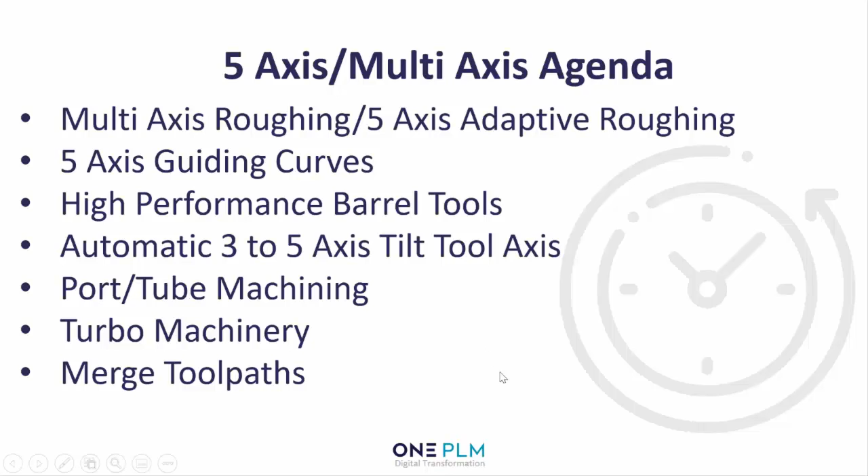So we've all seen that the manufacturers are quickly adjusting to the new market trends. To stay competitive, they are making significant investments in the latest hardware and software technologies. Sophisticated multifunction CNC equipment, high-speed machining and toolpath verification are some of the biggest impact investments in the last 3 years. Today we'll talk about one of these technologies, 5-axis or multi-axis machining. You'll learn about the latest developments in this area and how you can utilise this technology to run a more efficient machining business.

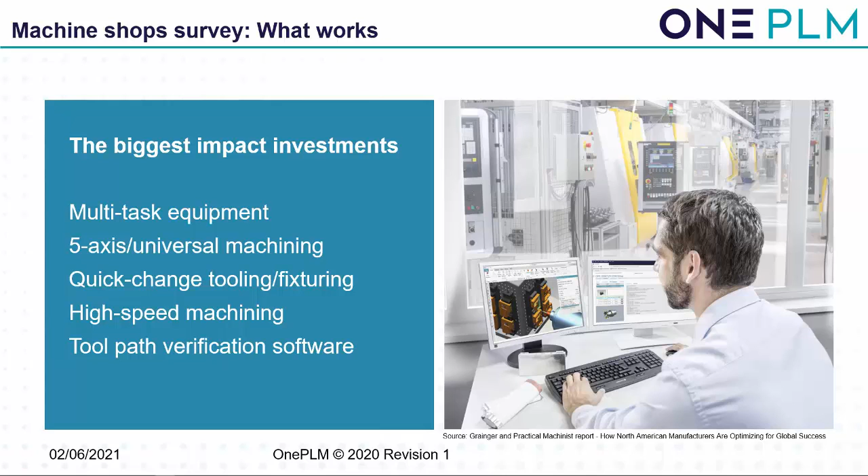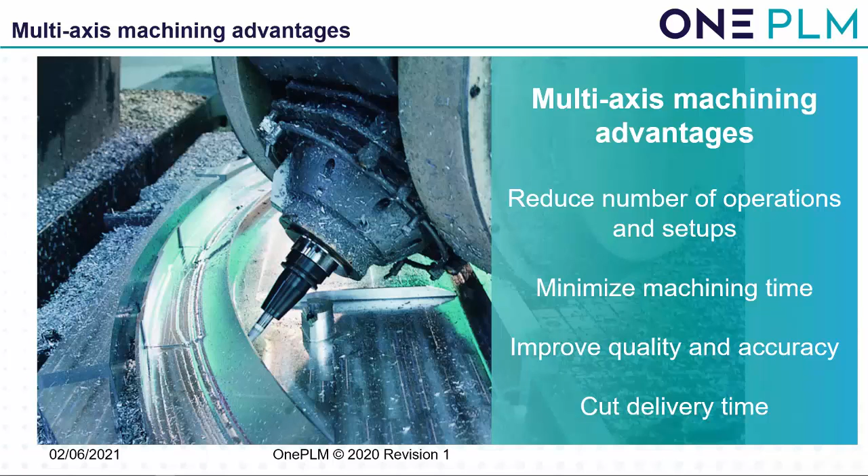Manufacturers are increasingly using 5-axis machining because it provides powerful advantages. You can produce complex parts with fewer operations and setups. In many cases, you can reduce machining time, improve tool life, and also improve part quality. Consequently, this helps you cut production costs and deliver parts faster.

5-axis machining is typically used for manufacturing complex parts with challenging geometry, such as aircraft structures and engine components. As the complexity of different parts has been increasing, 5-axis machining has been used for a much wider range of parts, including mould and die and medical. The machining process can be quite challenging.

The simultaneous 5-axis operations are performed on high-performance machine tools. Maximising machine uptime and avoiding collisions are critical for these operations. So as well as the aerospace industry, multi-axis machining is now being used in many other industries, including medical, energy and automotive sectors.

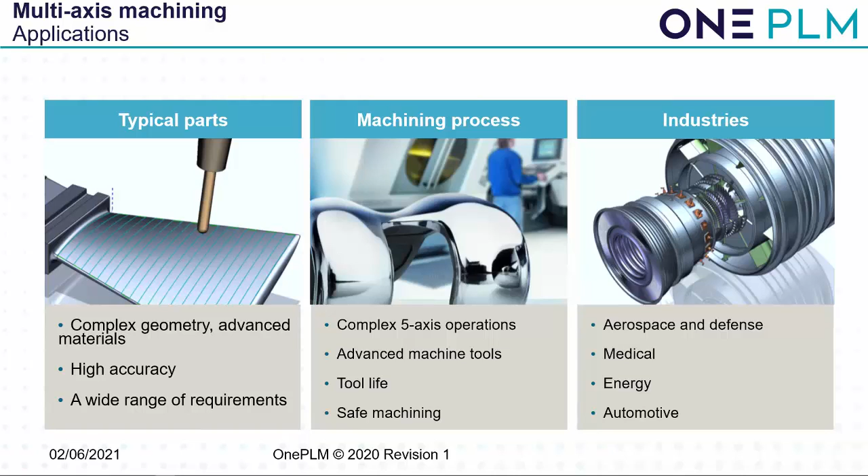To effectively program 5-axis jobs, you need a set of advanced tools in your CAM system. Most importantly, you need to have full control of every aspect of the machining process, especially the tool axis. Ease of use and minimising manual input to create these complex operations can help you be more productive.

Having specialised programming operations for specific operations, such as blisk and impeller machining or port machining, can be critical. Using standard generic 5-axis functions to program these types of parts can be time-consuming and can be prone to errors. Also, for seamless transition to 5-axis machining, advanced CAM software should also have capabilities to automatically convert 3-axis operations into full 5-axis operations. Collision-free, of course.

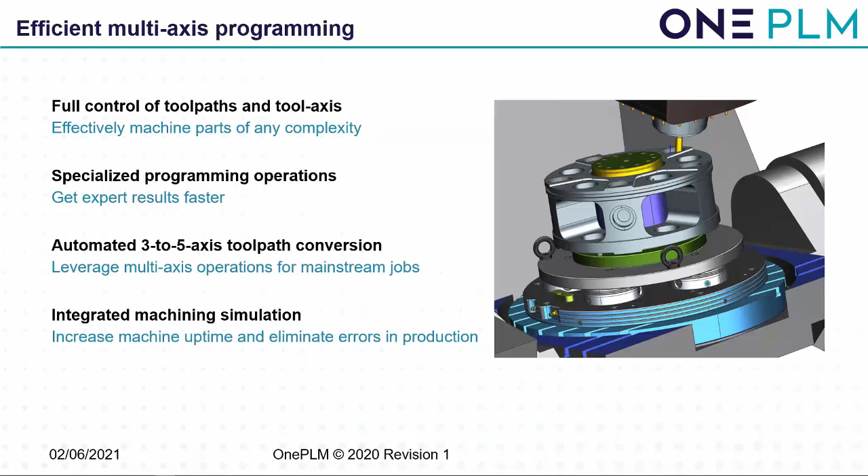First of all, let's look at multi-axis roughing. When machining a part, the goal is to remove material as fast as possible. Most of it's done in the roughing operation. When dealing with mould and prismatic shapes, the fastest way to do this is using our high-speed adaptive milling roughing cycle.

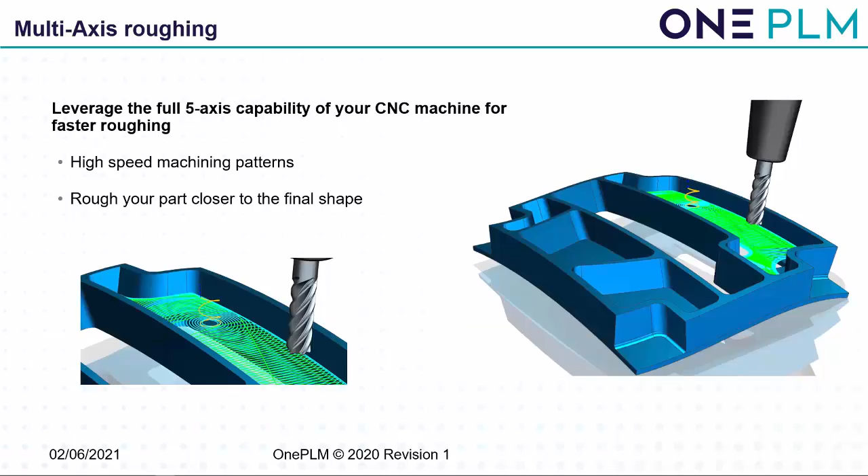With this type of toolpath technique, you can cut curved floors and other complex shaped pockets and features in simultaneous 5-axis mode. This allows for added flexibility to mill around these complex shapes and minimise follow-up operations to clean up any remaining material. It utilises the latest adaptive milling techniques of controlling step over, cut depth and chip thickness to employ high feeds and speeds.

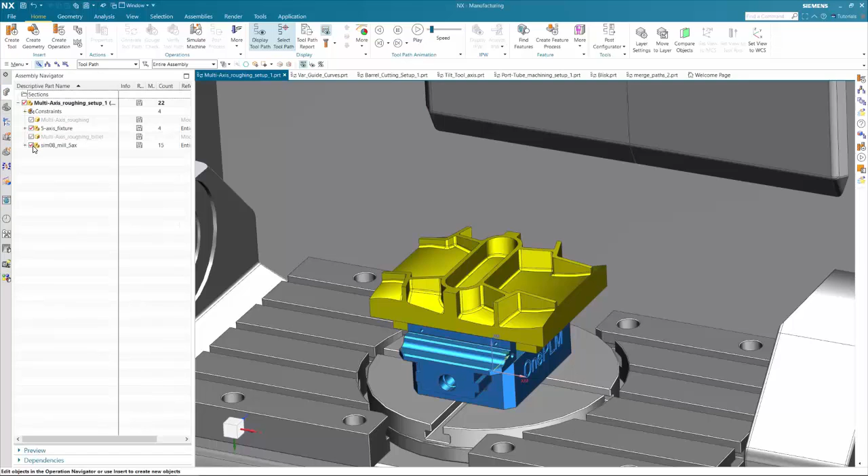So let's take a look at this in NX. So I've got this multi-axis part, it's got some curved floors, some curved profiles, and we're going to look at how we can quickly rough this out in a multi-axis mode. I'm just going to temporarily hide the machine so we can look at the toolpath in a little bit more detail. So here's the multi-axis roughing operation.

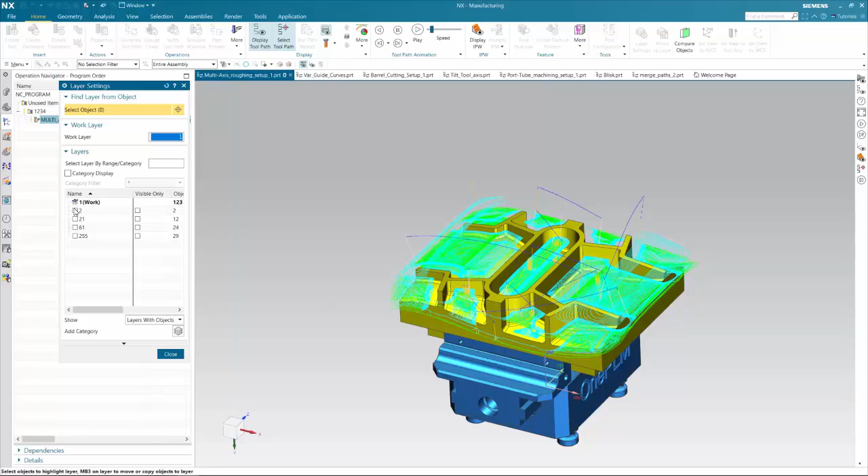If I just go in to have a look inside that operation, there are some things that are worth pointing out. We can specify a drive floor and calculate the depth mode from that floor, or we can define a drive ceiling and define the depth mode from that ceiling, or in this case I've defined both and we're going to interpolate between the two. If we just quickly look in my layers, you can see that I've created just a simple curved surface as the drive ceiling and a surface as the drive floor.

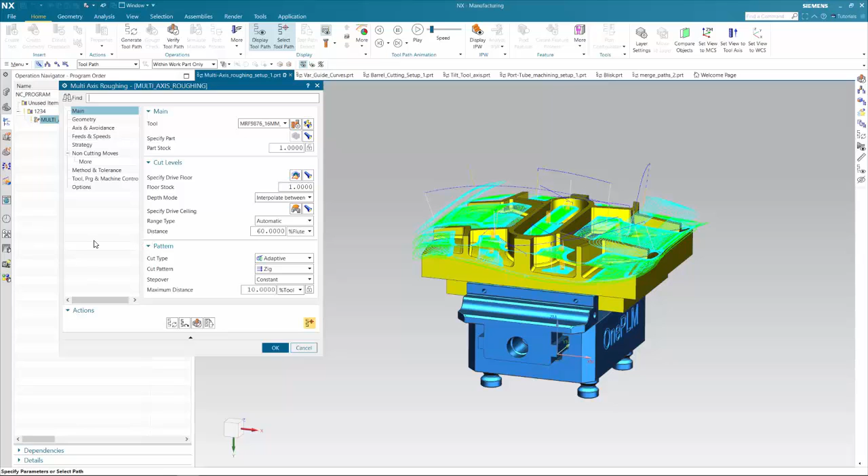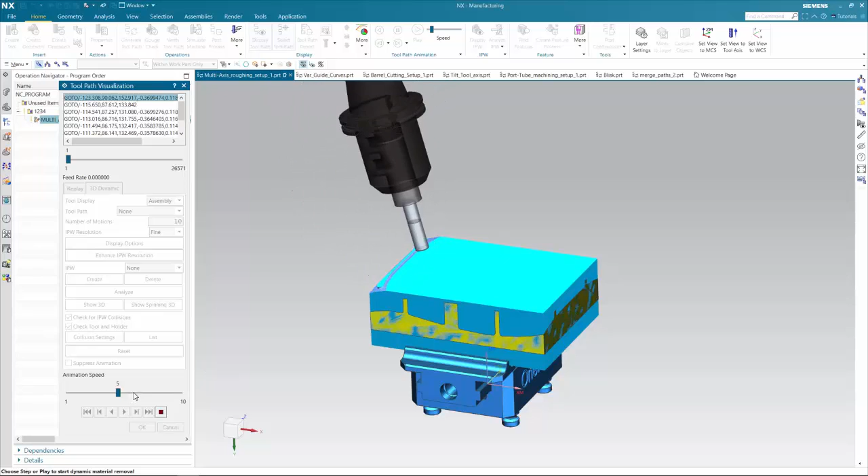I'm using the adaptive cut type and I've defined the cut depth and step over and so on based on the requirements of the operation. If we just verify this, you can see that if I quickly just press play, this is a true simultaneous 5-axis operation. The tool axis is indeed changing angle all the time, and this is being driven automatically by the operation. I didn't have to put any tool axis vectors in or anything like that.

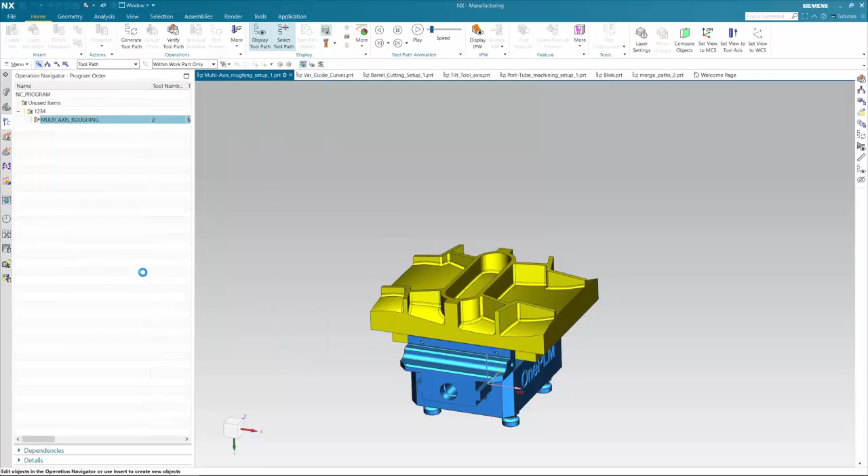I mentioned earlier that one of the big necessities of multi-axis machining is the ability to simulate the G&M code offline before you send it out to the shop floor onto the real machine. I'm going to just switch the machine back on, and then I'm going to go into NX's simulate machine function. This is built inside of NX. This is standard in NX nowadays. I go into Simulate Machine.

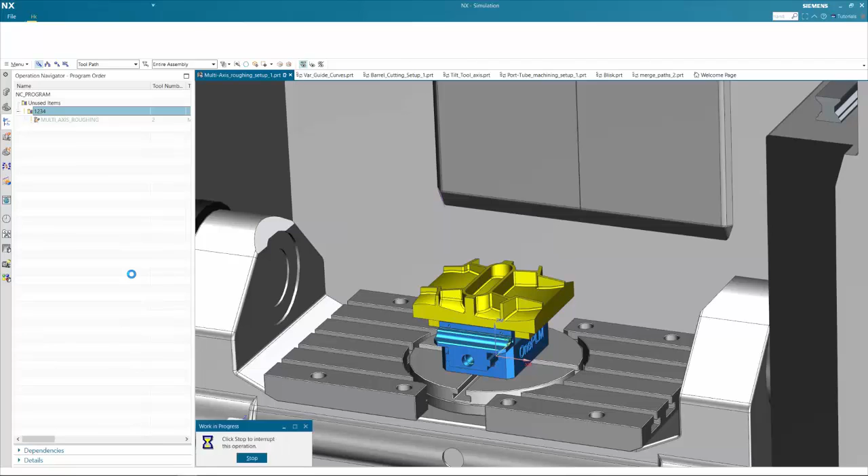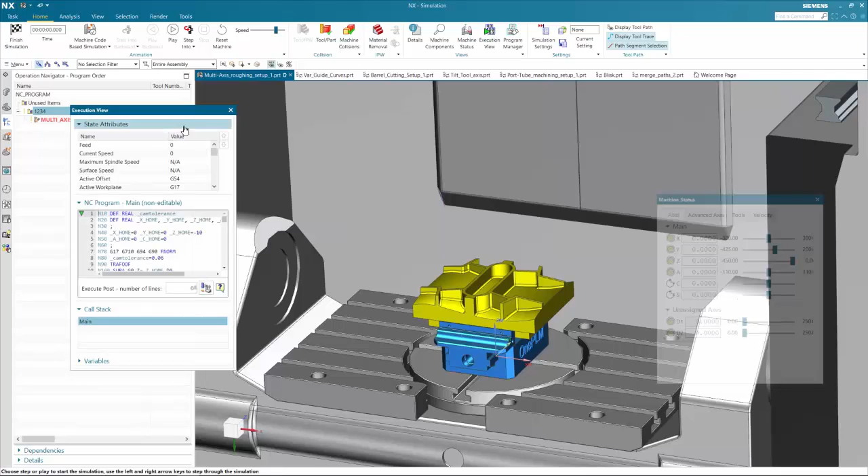So you can see that the program has been post-processed in the background, and this is the detail in this window. We can also have other windows open, such as machine status, which shows us the tool axis positions, highlights if we're going to get any soft limit errors, that type of thing. Okay, so I'm going to switch on the material removal, and I'm going to simply play this, and we'll see the true G&M code simulation.

You can see I've got the display tool trace switched on. I can switch that off. I can show the whole toolpath if I choose to, or I can just have it showing the material removal simulation. Let's just speed that up a fraction. This is based on the feed rates specified in the G&M code. So we'll speed that up so we can just see what's happening.

Now in the background, NX is checking for collisions. It's checking for gouges of the work part, and you can either get the simulation to stop when it sees a collision or a gouge and highlight that, or you can just get it to output a report at the end of the simulation for you to analyse and make amendments if needed.

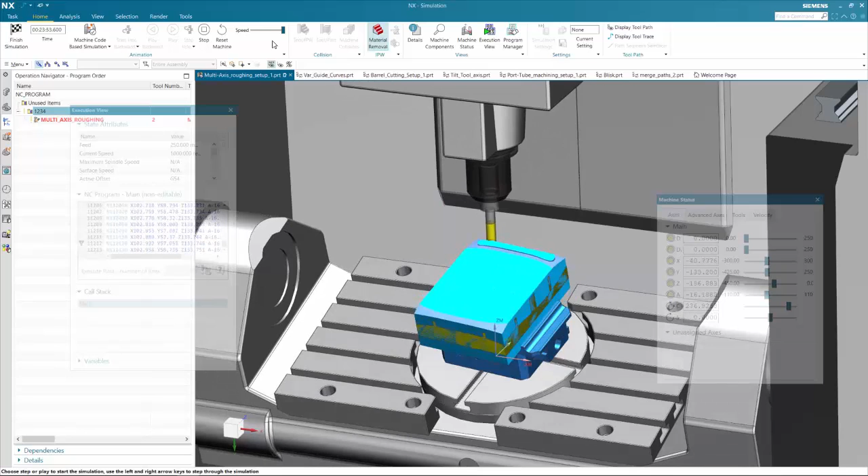So as I say, this type of inbuilt G&M code simulation inside of NX is essential for proving out these complicated multi-axis type toolpaths. Okay, let's stop that and let's finish and go back into standard NX CAM.

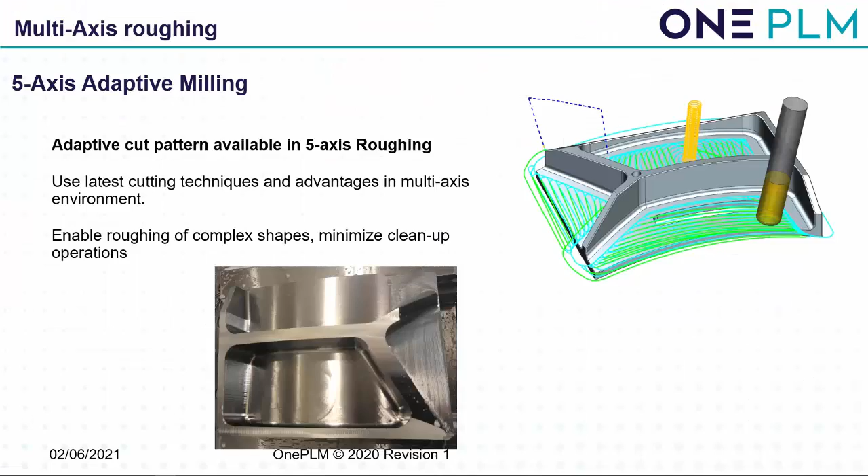The next method I want to talk about is a 5-axis finishing operation that we call guiding curves. This is a powerful operation that will let you create a 5-axis toolpath directly onto the machining area with full control of the toolpath flow. It does this by selecting a curve or multiple curves that will guide the toolpath on the selected machining area.

So no more creating projection surfaces in the CAD. No more trying to figure out which direction to project the toolpath onto the machining area. These are all things of the past with this new operation. You have access to full tool axis control, whether you want to stay normal to the surface, interpolate between several tool axes, lock some axis, etc.

Also, just a quick note on the tool axis, it's not just about putting vectors onto the part and running it on the machine. You also need to have proper control over the smoothing as the tool axis goes from one position to the next.

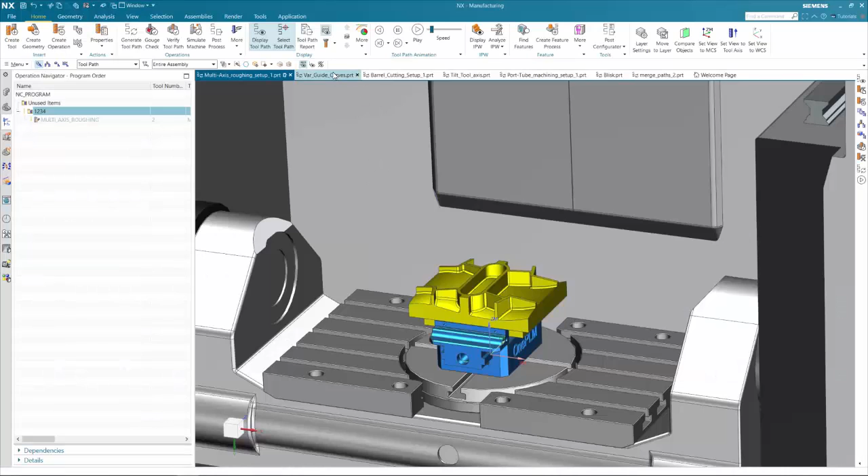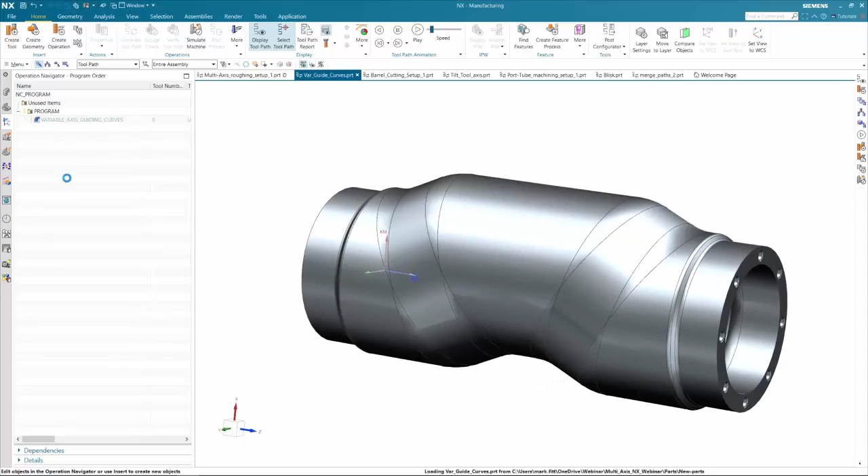So here I've got a sort of mill turn type scenario. So we might be looking at this on a mill turn type machine, and we want to machine the surfaces in the middle of the part there using a multi-axis toolpath. So I've created a variable axis guiding curve operation, and if I just go into that to have a look at that, you can see it's showing the toolpath. I can switch that on or off as needed.

I've defined the cut area. This is the area that I want to cut. No other surfaces needed, no projection surfaces, nothing like that. I've also, in this case, defined 4 guiding curves. As I said, it could be a single guiding curve or multiple. And these will dictate the flow of the toolpath from one end of the cut area to the other.

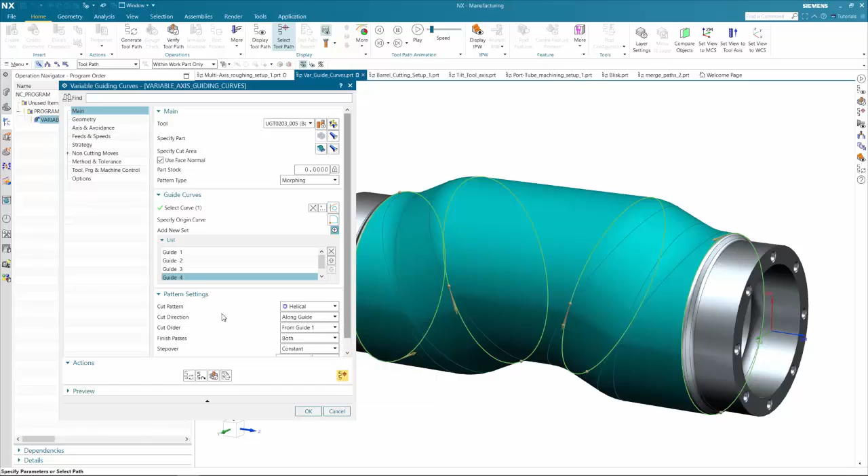I've defined a helical cut pattern to keep the tool fully engaged on the part, and obviously the direction of cut and the cut order have also been defined. So let's verify that just to have a look at what's happening. And if we go into the replay mode and just press play, you can see this is a fairly straightforward operation. You can see, just as a point, I'm using a solid tool here.

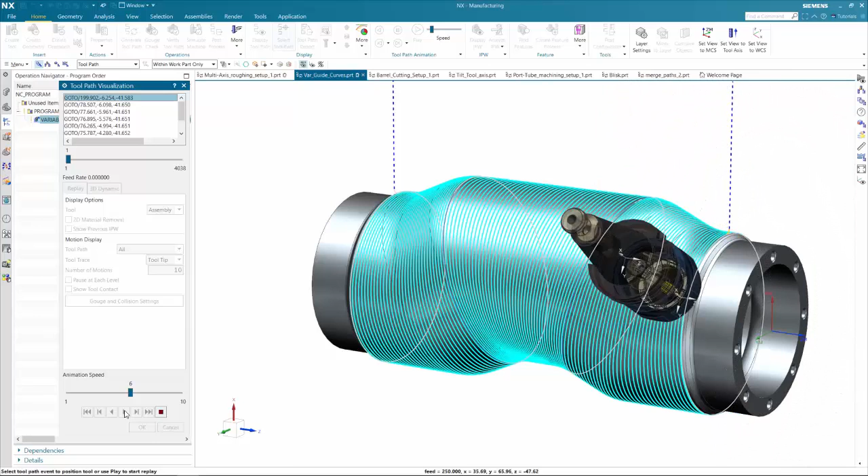So this tool has been modelled in the CAD functionality to accurately represent exactly what I'm using on the machine. So any collision potential or gouging is very, very accurate. We can snap to different portions of the toolpath, so we can analyse this toolpath quite nicely.

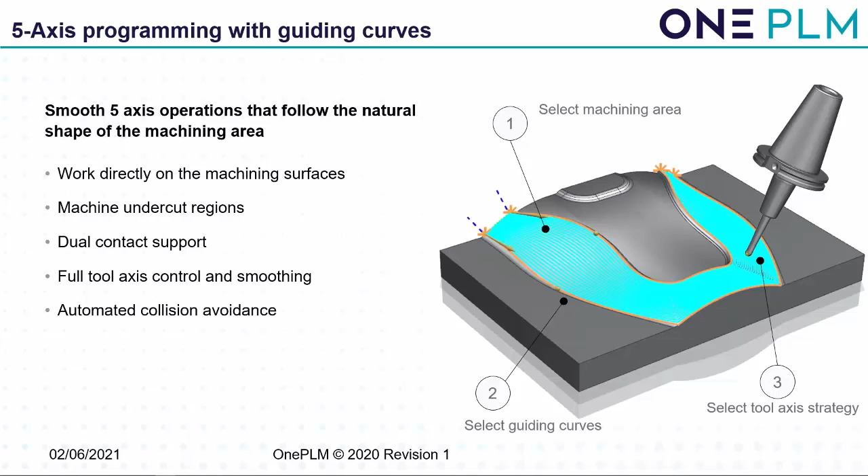Okay, so I just want to talk about barrel cutters. So barrel cutters have been around for quite some time now, particularly in aerospace and defence type of areas. However, they are now getting more mainstream. So just a quick recap on barrel cutters, what the benefits are and what they're good at. Barrel cutting tools are used for various machining operations, including finishing of flat or slightly curved walls.

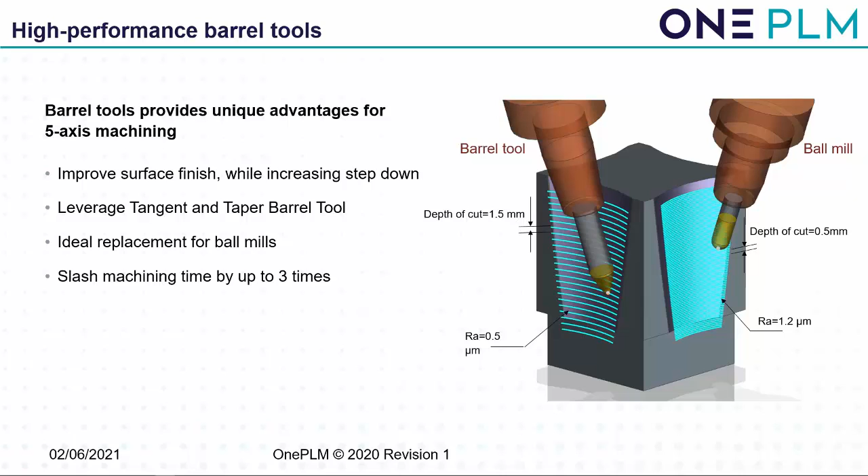So I've got this example of this particular part. This is an aerospace bracket. I've roughed it out using a standard adaptive milling operation. And the first operation is a fairly standard variable contour operation.

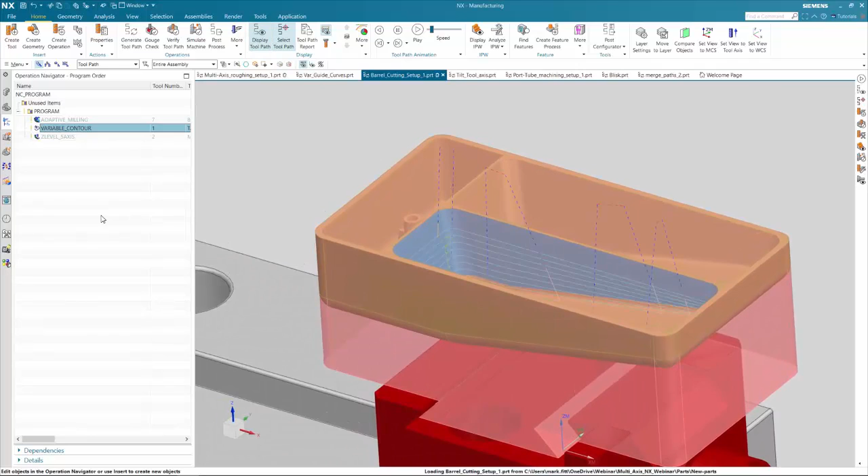If we just display that toolpath and if we replay that, you can see that this is a barrel cutter and you can see it's following the profile around there. And I've got a fairly aggressive step down, and because of the barrel cutter, I can still get a good finish using that aggressive step down.

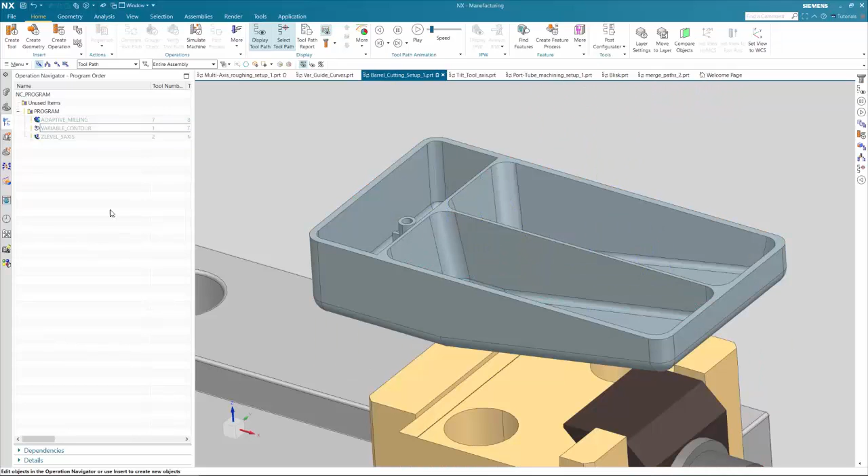As an example, or as a way of seeing the difference, I've also created a fairly standard 5-axis Z-level operation, but this time using a ball nose cutter. I've used a similar step down just so we can compare the differences. And again, if I replay this, you'll see that this is obviously a ball nose cutter with, again, the fairly aggressive step down.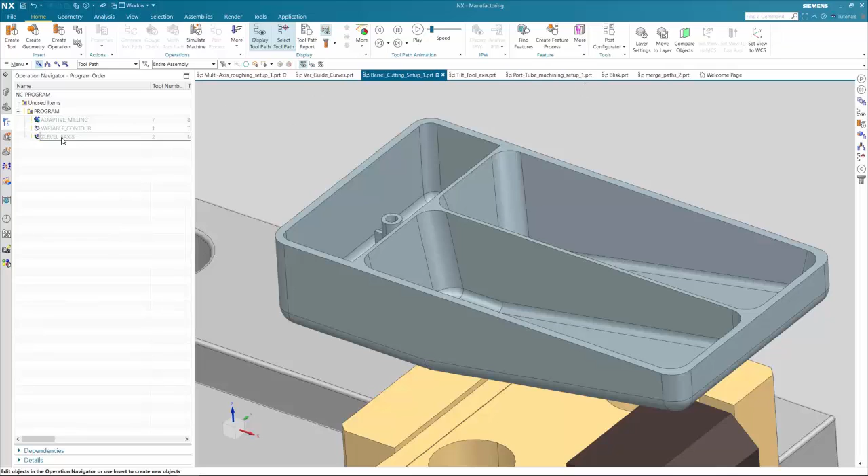I'm going to use our analyze operation to just have a look at the different surface finishes that we're getting with those 2 different types of cutters.

So you can see this is a colour-coded analysis tool that shows us the material status, and you can obviously define the different gradients yourself. So if we look at the pocket where we've used a barrel cutter, that's a fairly good finish, and we could improve on that, I guess, by decreasing the step down slightly, but that's fairly acceptable.

Whereas using the ball nose cutter with the same step down, you can obviously see the scallops, and you can see the issue we're going to have there. If we click on one of those scallops, you'll be able to see that we're obviously leaving a lot more material in those areas than we would be with the barrel cutter. So that's a nice way of just identifying the different surface finishes using the analyze tool.

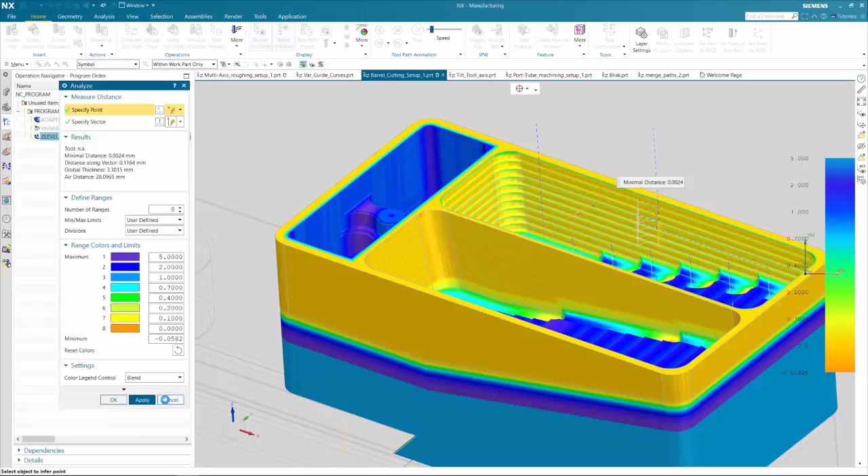During my earlier introduction, I mentioned the need to go from 3 to 5-axis machining very easily. When dealing with deep cavities, a 3-axis toolpath will be very limited because of the collision potential with the holder. What NXCAM will allow you to do is program in 3-axis, and the system will constantly look ahead for tool holder collision.

When none is encountered, a 3-axis toolpath is output. When we see a potential collision, the tool axis is gradually tilted away from the collision area, resulting in a 5-axis toolpath. As you can imagine, this is a very popular and efficient feature in the mould and die industry. The functionality is also extremely useful for companies moving from 3 to 5-axis machines.

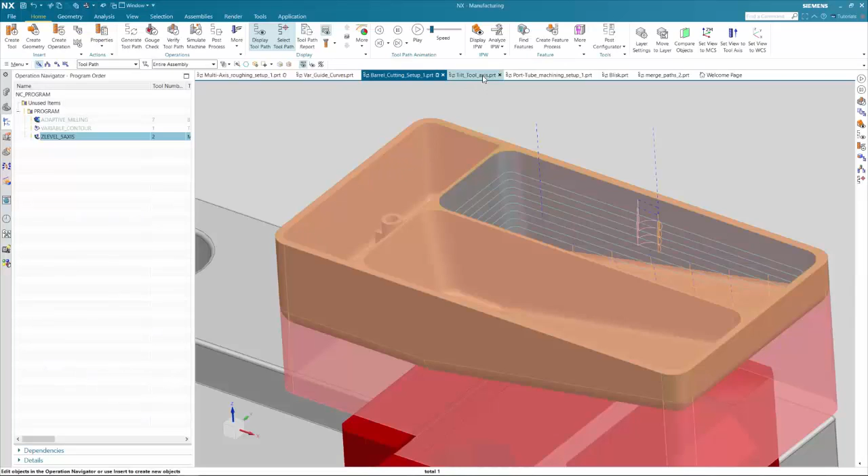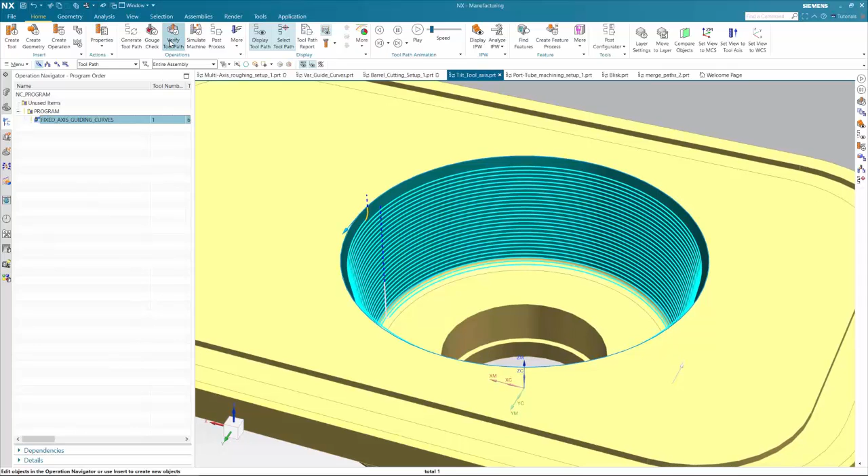So in this example, I've got a fixed axis guiding curve operation, created using the fixed axis module. I've created just a simple toolpath to machine down the walls of this particular pocket. If we look at that in verify mode, at the top of the pocket everything's fine, no collision potential. But as we move down towards the bottom of the pocket, you can see I've got collisions there.

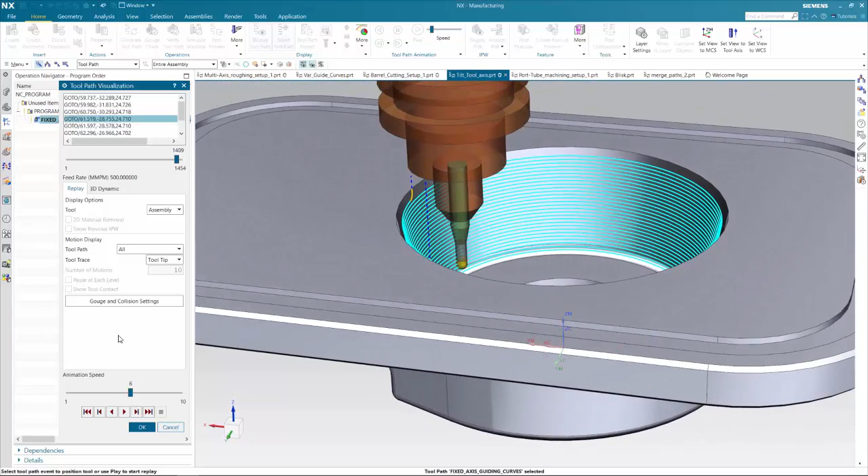Now, I've actually turned off the gouge checking on this particular operation just so I can show you what would happen there. So obviously with a fixed axis, we would have to extend the tool a lot longer, and that causes issues in itself. Just to show you an example, if I quickly hit the gouge check on that and say OK, you can see that toolpath is creating gouges. Once it gets to a certain level, it's showing these gouges, and we get this toolpath report showing us all the detail.

What I'm going to do then is automatically convert that from a fixed axis toolpath to a multi-axis toolpath. I can do this either inside or outside of the operation, but we'll go inside the operation itself. Under the avoidance, we can change that to tilt and retract. Even though this is a 3-axis toolpath, we can still do this. And we can set up the variables, so minimum and maximum tilt angles, clearances, that type of thing. I'll accept the defaults, OK that, and generate the toolpath.

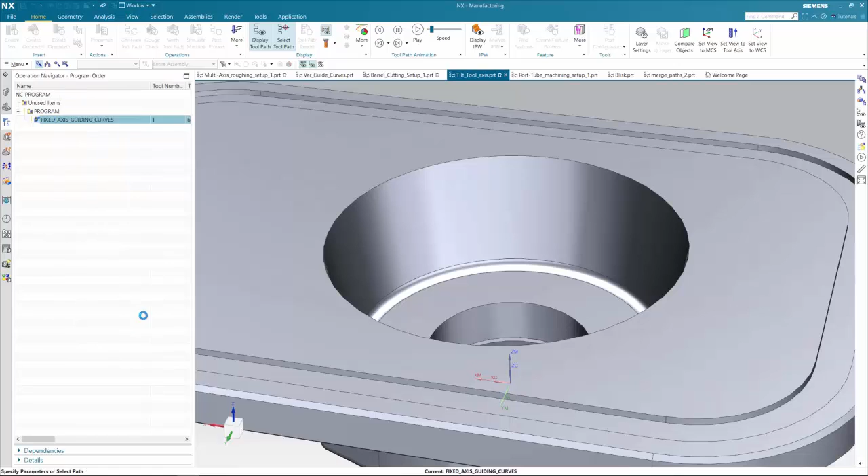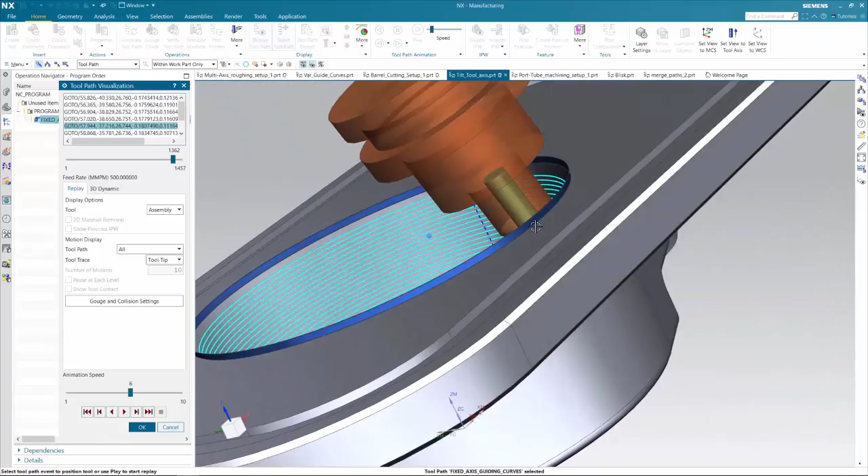OK, if we now verify that toolpath, at the top, again, not too much collision potential, but as we get down towards the bottom, you can see NX has tilted that tool over so that there is no collision potential. So it's automatically converted a fixed axis operation into a multi-axis operation. That means if you've got an existing operation on a 3-axis machine and you want to put it onto a 5-axis machine, you don't have to reprogram the part. You can just automatically convert to multi-axis toolpaths.

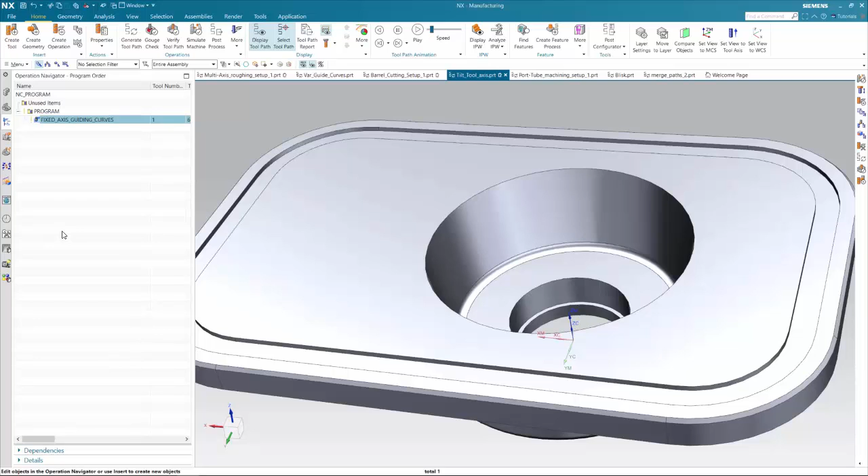A recent addition in NX of rough tube and finish tube operations allows us to quickly program complex shapes such as ports, intakes, etc. We have a choice of machining side, crossover points. The tool axis is again handled automatically to decrease programming time and provide the best tool axis solution. As we've previously seen, true G-code machine simulation on these types of toolpaths is essential. We'll take a look at NX CAM's internal simulation package again, and at the same time look at the tube machining.

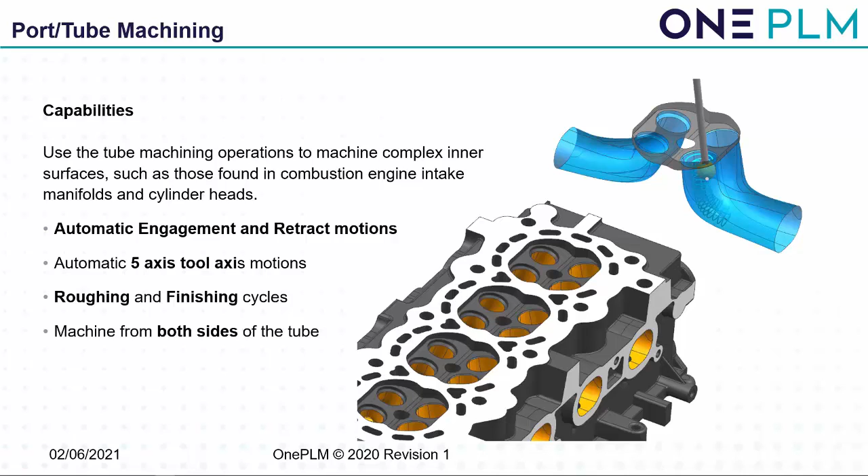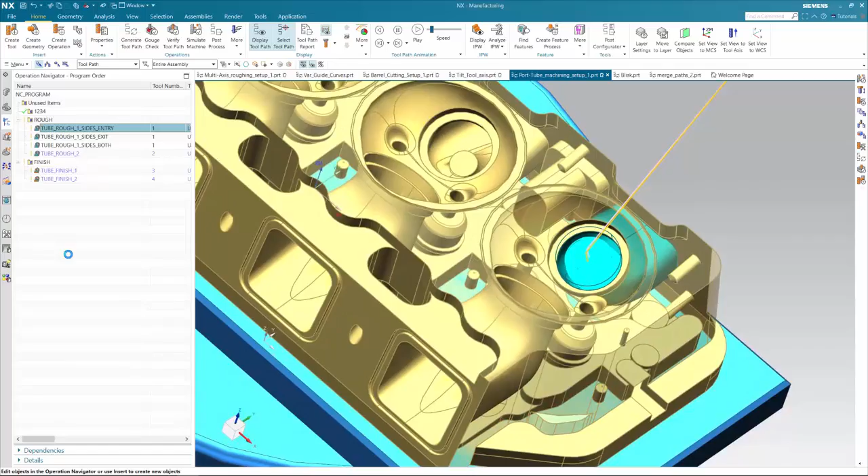So here we've got the cylinder head on the same machine. Let's just quickly hide the machine temporarily, and we'll look at these operations. We've got roughing operations, tube rough, and I've programmed an operation that comes from one side of the feature and machines down to roughly halfway. Then I've taken the same type of operation, but this time machining from the opposite direction, what we call the exit direction, again to approximately midpoint of the feature. And that's acceptable, breaking it into two different toolpaths.

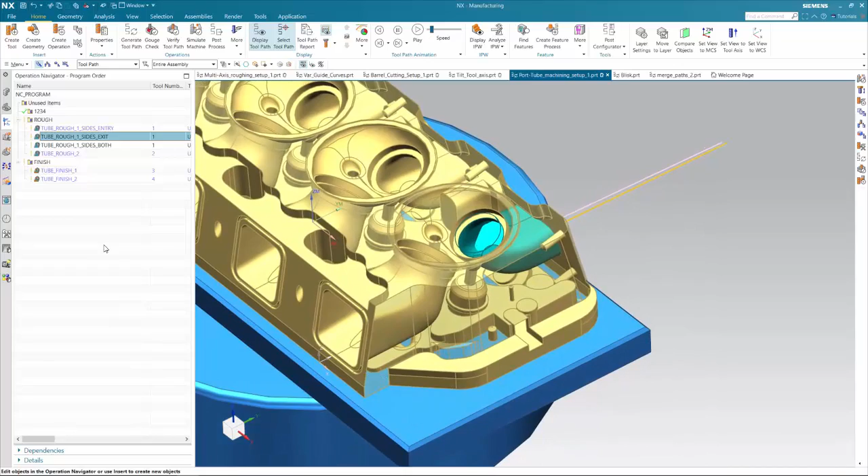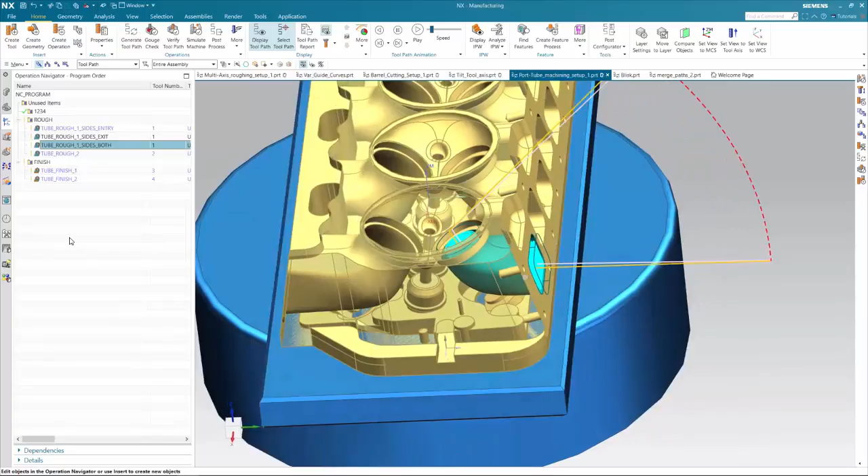But we can also create one toolpath that attacks from both sides. It will machine from the entry side down to a specified point, which could be 50% or could have an overlap, and then it will come around and machine from the exit side. So you're roughing the whole feature out in one toolpath, in one operation. And then I've done the same again on the opposite feature.

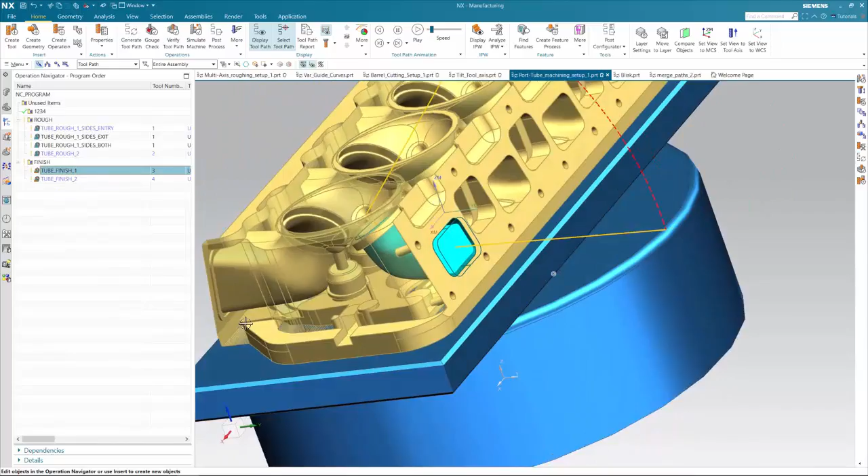I've created a tube finish operation. The tube finish operations are very similar to the tube roughing operations, the only difference really being the toolpath pattern, because obviously we're now finishing. So if we look at the tube finish operation, you can see if I zoom in there, it's a sort of profiling type operation. In this case, I'm helically profiling around that feature.

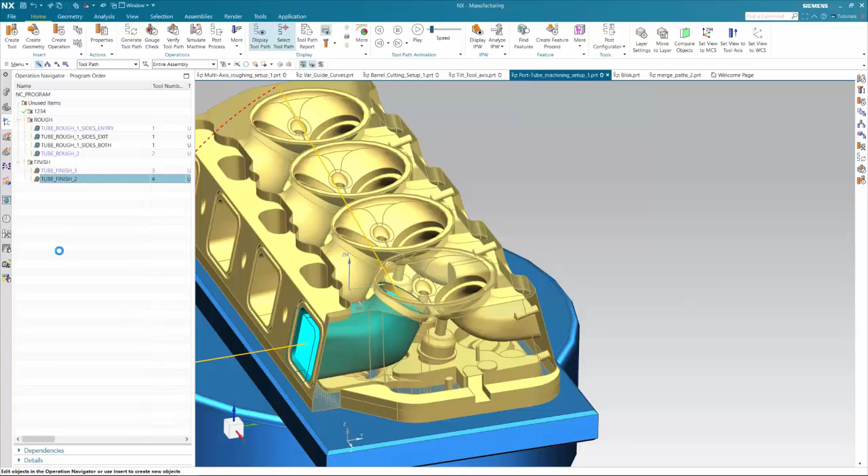And you can see, again, I'm machining from both sides, from the entry side and the exit side, and meeting at some point in the middle. And similarly with the opposite side. So again, this type of toolpath on this type of component, it's really essential that we prove these out offline before we go onto the shop floor.

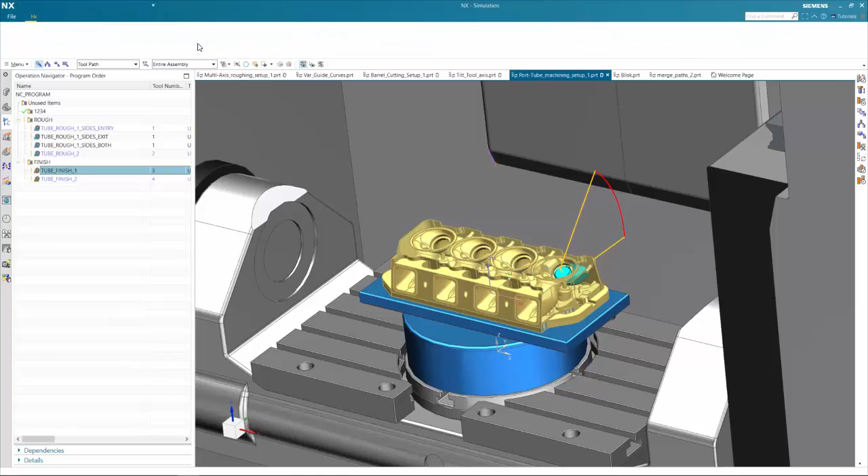So if I switch the machine back on and we go into the machine simulation area of NX, so again we can see the post-process program. We can see the machine status again if we choose to, and we can start to run the G&M code so that we're proving out offline. So let's press play,

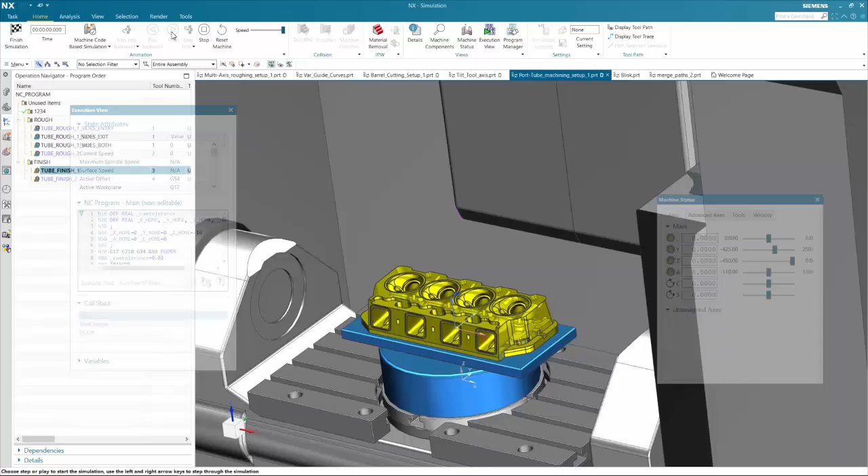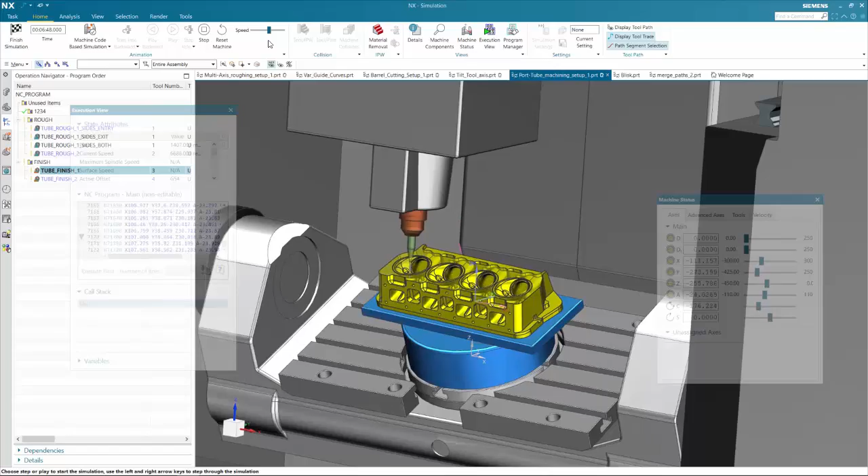and you can see the tool comes in and starts the machine. I can display the tool trace so I can then see the toolpath that's being created. Sometimes that's helpful. You can see the machine's moving around quite a lot, so this is why this type of toolpath really needs this offline prove out. Okay, let's stop that.

The NX Turbo Machinery module, it's been available for quite a few versions of NX. It's a specific module that's specially created for complex blade type components. It optimises the programming of these 5-axis parts such as impellers, blades, blisks and so on. Again, using automation where necessary to control the tool axis and the cutting strategies, so you can get quick, efficient toolpaths.

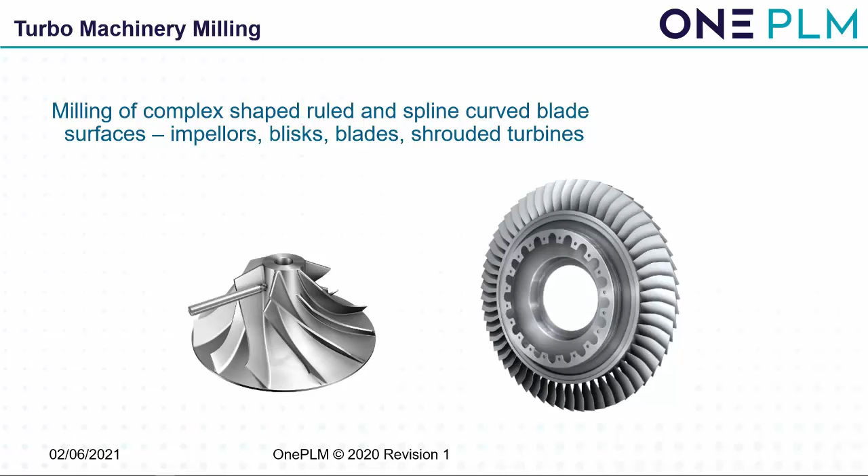The turbo machinery functionality has been developed over the versions to keep pace with the complex and different ways of machining these types of parts. One of those enhancements is the addition of multiple stripe cut level support. This allows for the precise blending and division of multiple toolpaths on these turbo machinery blades. It's a great aid when cutting long, thin-walled blades where the milling of material needs to be broken into steps.

The stripe cut levels feature allows the toolpath of the blade to be broken into top, intermediate and bottom sections. These can then be independently controlled and seamlessly blended between different cutting operations.

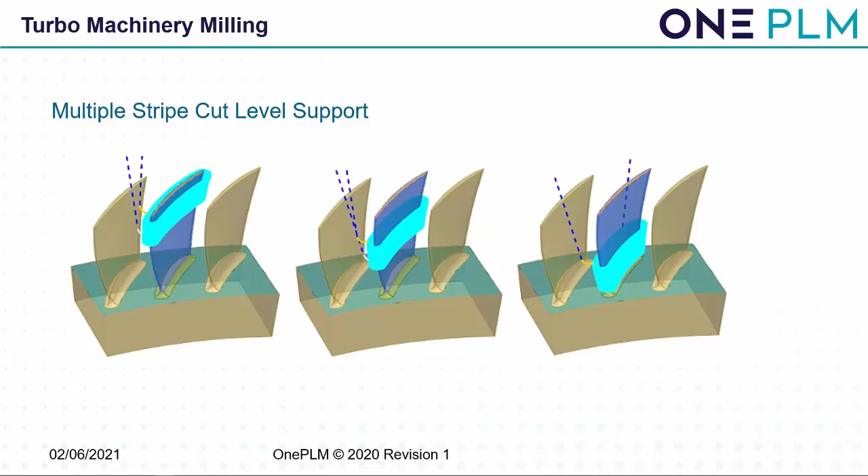Another enhancement has been the addition of toolpath support for the tangent barrel tools. So with the addition of this tangent barrel tool support, blades and other spline curved walls can now be machined much faster. We also have the ability to adjust the amount of stock material left behind different areas of the blade. So therefore precise control of stock removal can be achieved.

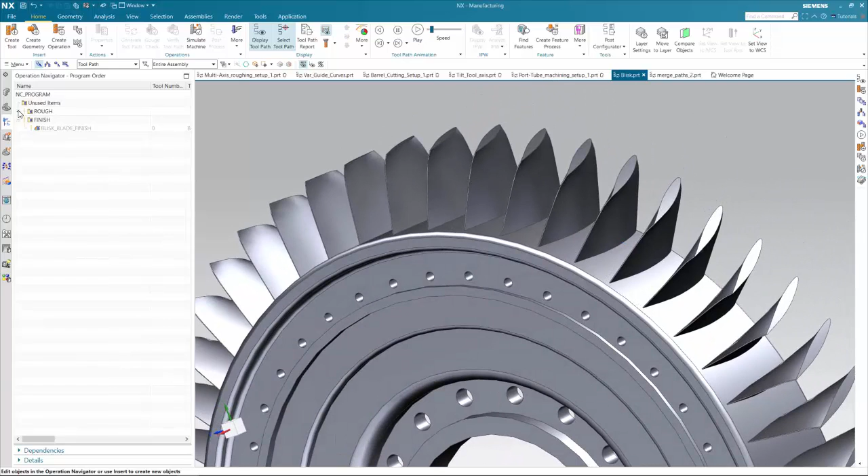Let's look at that multiple stripes. So I've got this blisk and I've roughed it out. I've created a roughing operation to rough between the two blades there, and then I've transformed that operation associatively to machine the rest of the component. I've then created a blade finish operation, and you can see this is machining from top to bottom on that particular blade. Let's have a look at that.

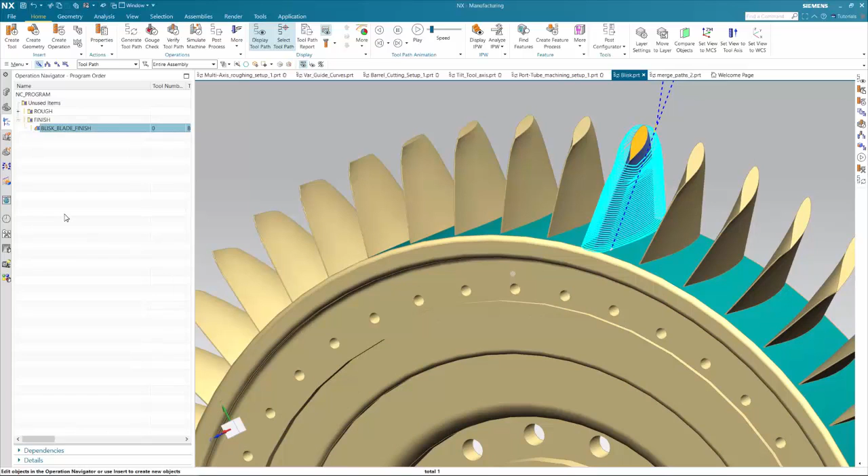So this is a typical blisk blade finish operation. You can see we can define which sides of the blade to cut. We can define how the depth mode works. Does it interpolate from the shroud or the hub? And obviously the depth per cut and so on. We're using a helical cut pattern. Now the range type, instead of leaving it at automatic, we've got this multi-stripes option.

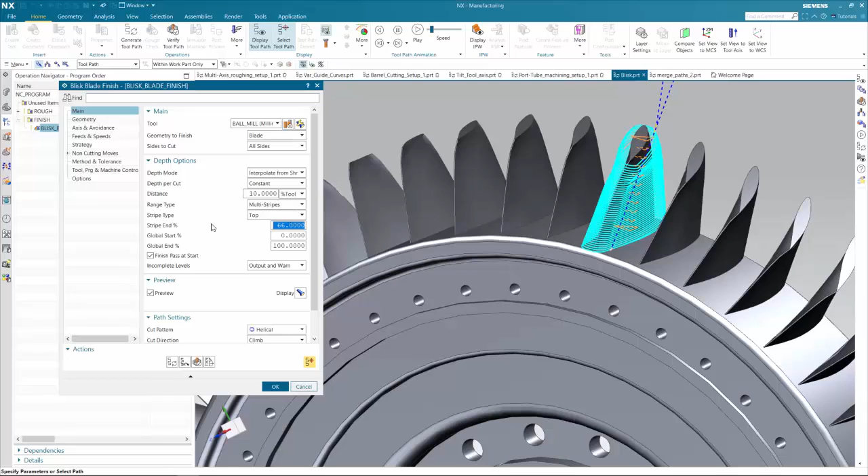So if I define multi-stripes as a range type, I can then say top, intermediate or bottom. So let's say top, and let's say we start from the top and we go to, I don't know, let's say 30% of the depth of the blade. If I regenerate that, we can see that we now just have the toolpath at the top of the blade.

And so the principle with this would be that we would accept this operation, we would then copy it, and then in the copy we would change the stripe type from top to intermediate or possibly bottom, and we would then define the percentages and regenerate. So we can control the levels of the blade quite accurately.

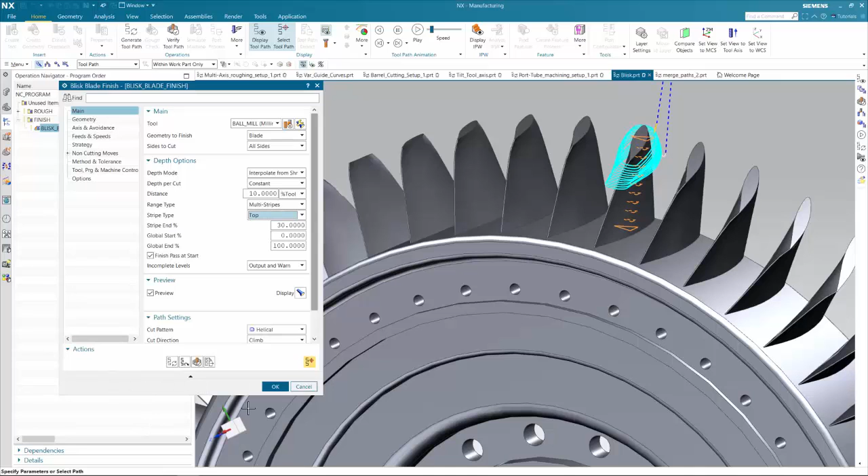The ability to merge paths is a recent enhancement that allows us to combine two or more operations into a single operation to improve machine efficiency. You can combine these operations using the Operation Navigator in NX and the Create Program dialog box. The operations that you merge must all use the same tool.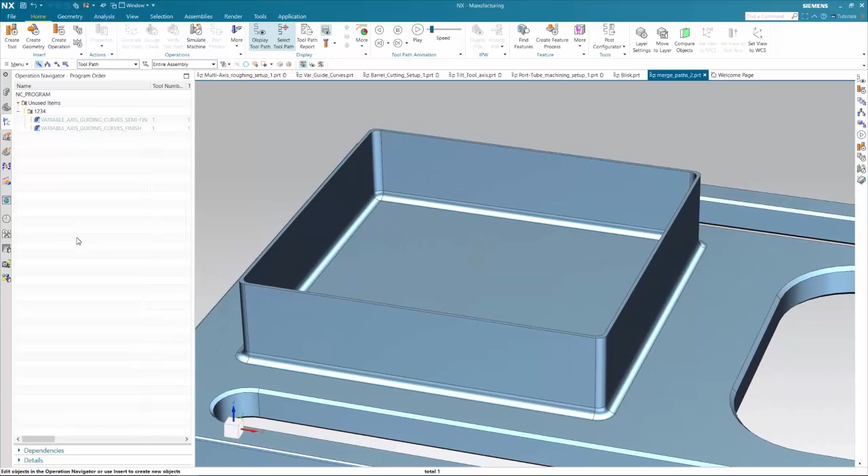So I've got a semi-finishing operation using a ball nose cutter, machining down fairly aggressive depths of cuts, and it's leaving 1/2 mil stock on for finishing. And then we've got the finishing operation itself, again using the ball nose cutter, obviously not so aggressive step down and leaving 0 stock to finish that component.

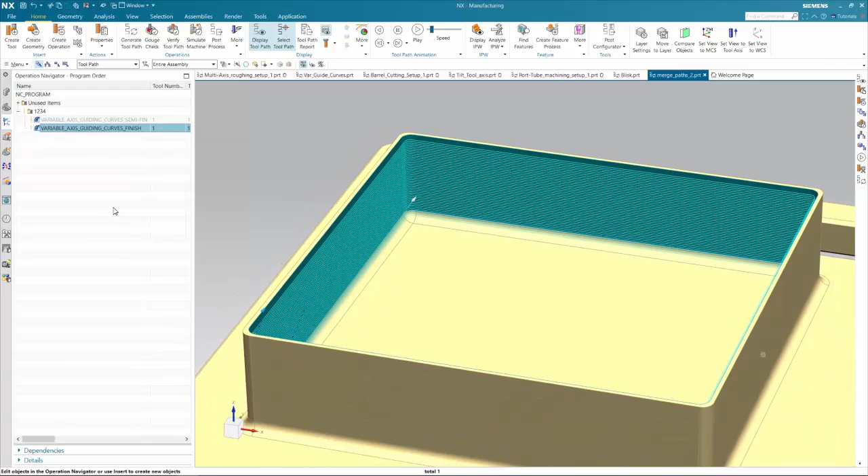So I want to merge these two toolpaths together because I want it to cut so far down with the semi-finisher and then finish, and then carry on with the semi-finish and then finish, and so on. So under my Create program, under Mill Multiaxis, I've got this merge path option. So if I OK that, I can now define how we merge these paths. Concatenation is one option, and the little diagram there shows you what that's going to do. And we've also got by contour count.

And what I'm going to do with this, I'm going to say the first semi-finishing pass is going to do 5 passes, and I'm going to add that to the list. And then the finishing pass is going to do 10 passes, and I'm going to just apply a little bit of lag there. I don't want the finishing to go all the way up to the semi-finishing, so I'm going to apply a little bit of lag. And let's say 2 there.

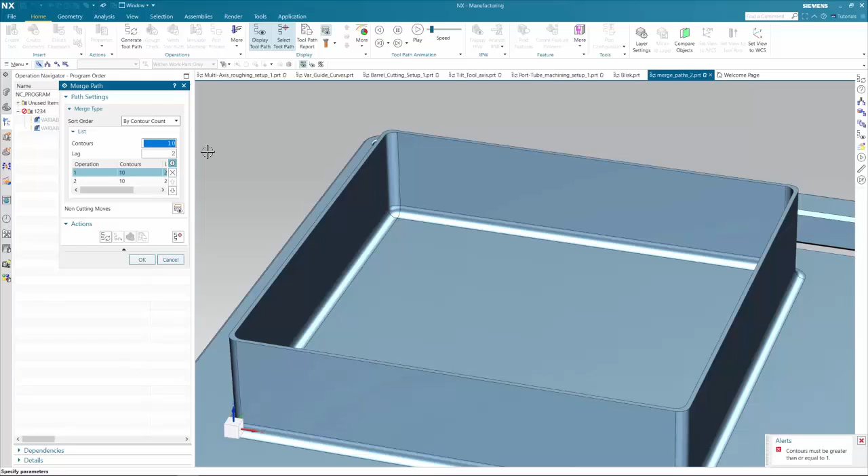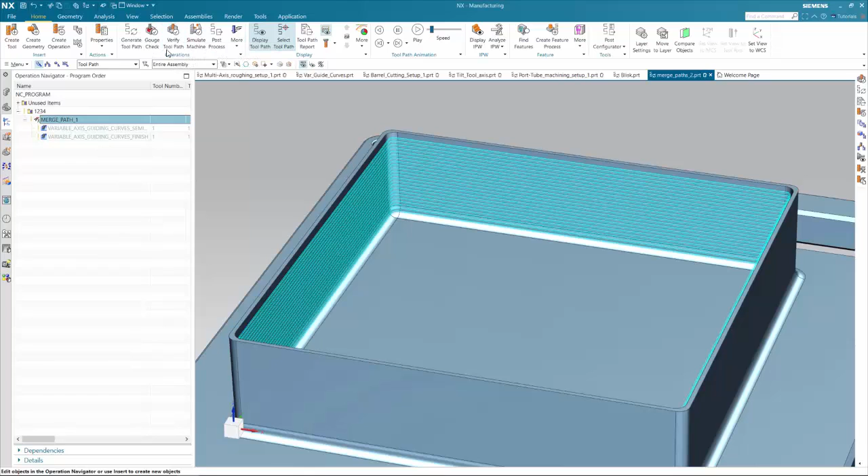And so if I say add new set onto that, oops, should have changed that, accepted that before. Right, so we've got 5 and 10. Okay, that. So this is created like a subfolder, if you like. And I'm going to drag the two operations into that subfolder, and I'm then going to generate. So if we now verify this, what we should see is, if I just slow that down a little bit so we can see what's happening.

So we've got the semi-finishing pass, and that will do 5 passes around that profile. And then we get the finishing pass, and that will go down so far. As I said, I've applied a lag of 2 to the finishing pass.

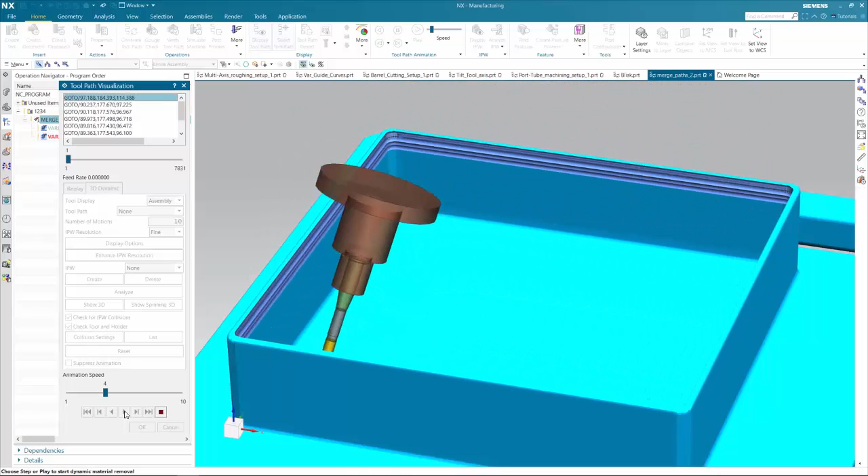So now we get the semi-finishing pass again, and again that will go down those 5 passes before changing to the finishing pass, which will then go down to catch up with the semi-finishing, and so on. So you can see, we could have done this in a very long-winded way before, but this is really quite nice using this new merge path functionality.

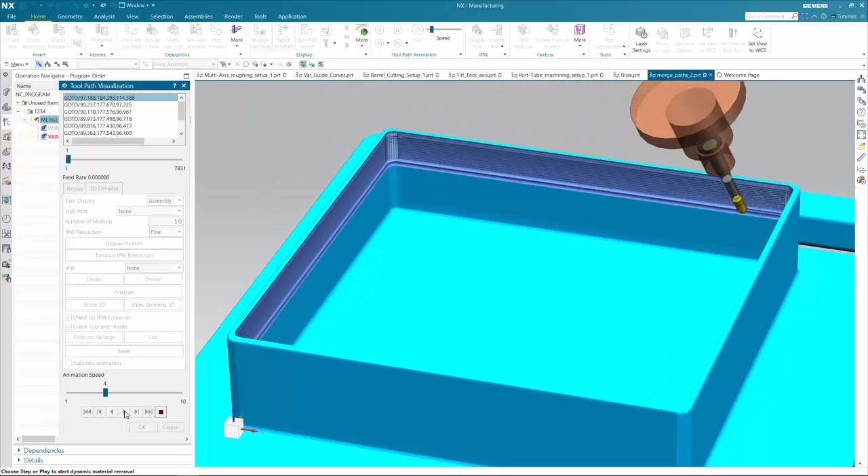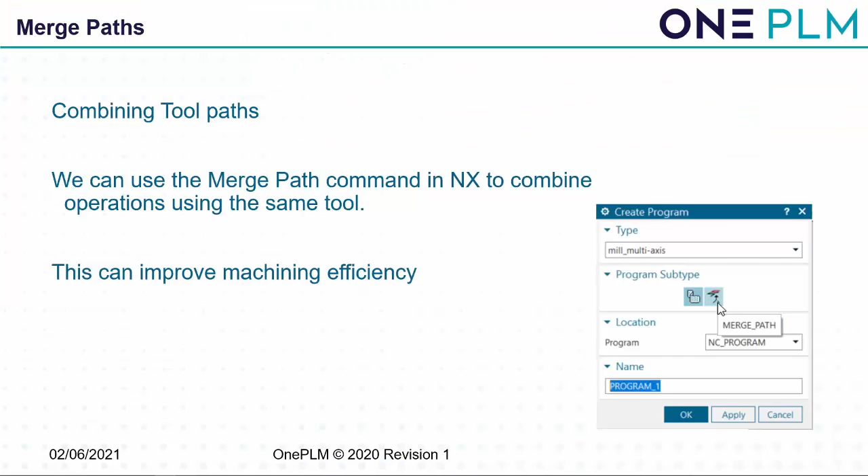Although not technically multi-axis, I just want to mention a new probing functionality that has been created and provided exclusively by OnePLM. This has been created to be a usable solution for a CNC programmer or production engineer. It uses exactly the same dialog boxes and tooltips that the NX CAM user has become accustomed to. OnePLM will also provide post-processor support to output the probing cycles in the correct format that your machine expects to see. There will be more information about this at the end, and we'll be running a specific webinar based on this functionality.

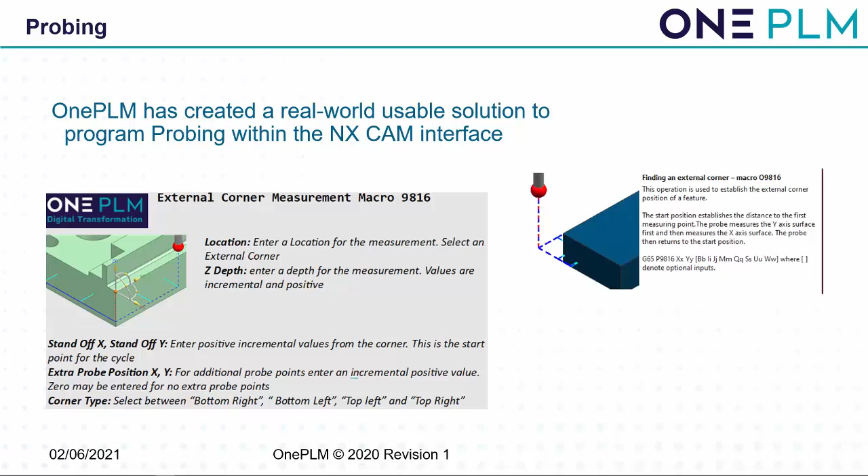So to sum up, as you're all aware, complex part machining requires more than just 5-axis techniques. To be productive, you need a comprehensive suite of programming capabilities, such as 3-axis milling, turning, hole making, feature-based machining, and machine and G-code simulation. You also need the ability to control and manage your tooling, your fixturing, and your shop floor documentation.

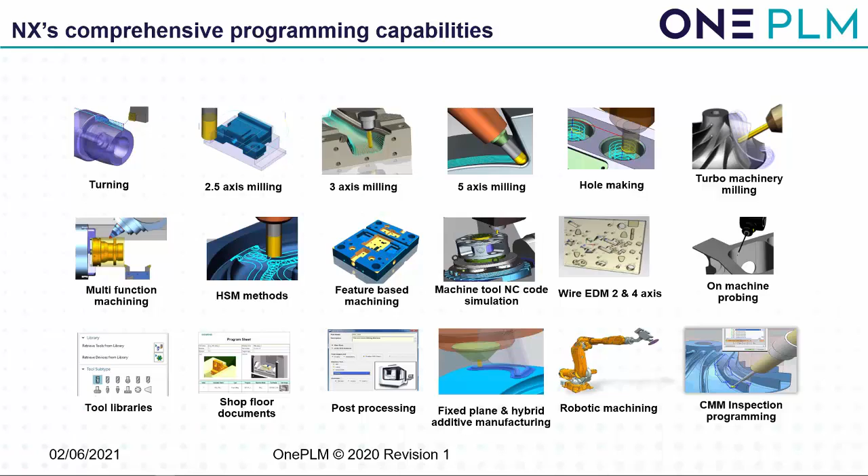So this is why the NX CAM system has been adopted across many industries, delivering proven manufacturing capability from aerospace to medical, from mould and die to power generation, and many more. The development speed from Siemens over the last few years has set the pace for multi-axis CAM software. Take a look at the very latest versions of NX. They'll seem a million miles away from the older versions.